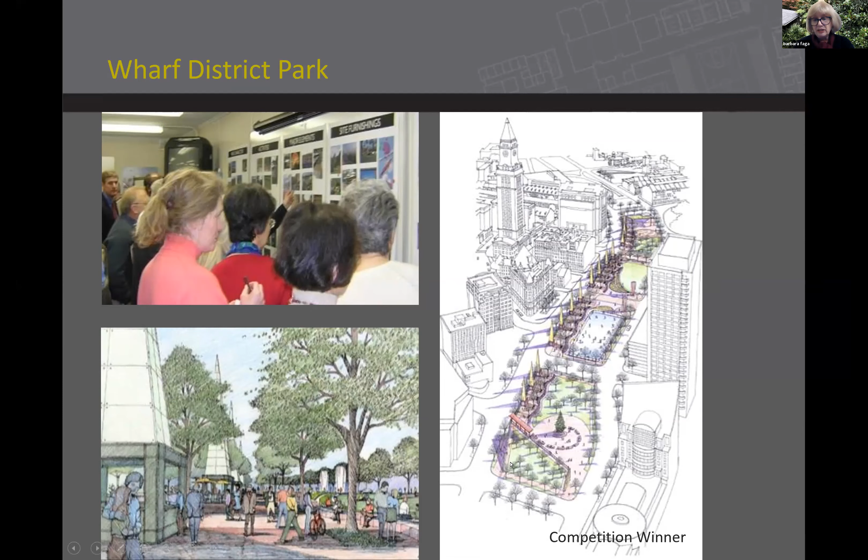So our team at EDAW was from our Alexandria, Virginia office and our Atlanta office, and this was what won. We were thrilled. We got the call right around Christmas time and we thought, wow, this is the best project ever. We were associated with a local firm there, which was important for us to have, since we did not have a Boston office, which was part of our problem.

So if you look at this, this is how we did it. These are old wharves, an old area where immigration happened for a long time. This was one of the central ports between Boston and Baltimore until Ellis Island was built. So all of these different wharfs happened.

We did a public design charrette workshop. We had a lot of different public meetings over the project. We were contracted to have 5 public meetings with the Turnpike Authority, but ended up having almost 200 meetings to get this approved. So you can imagine what this was like for planners.

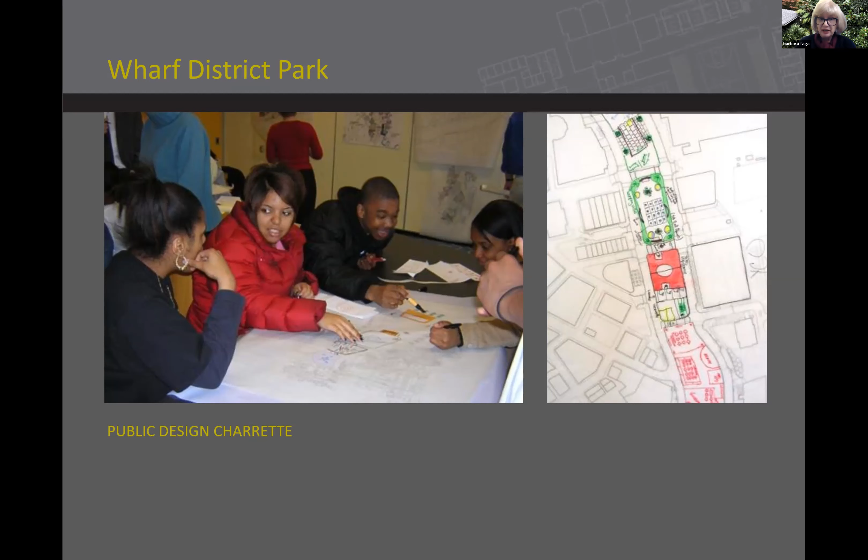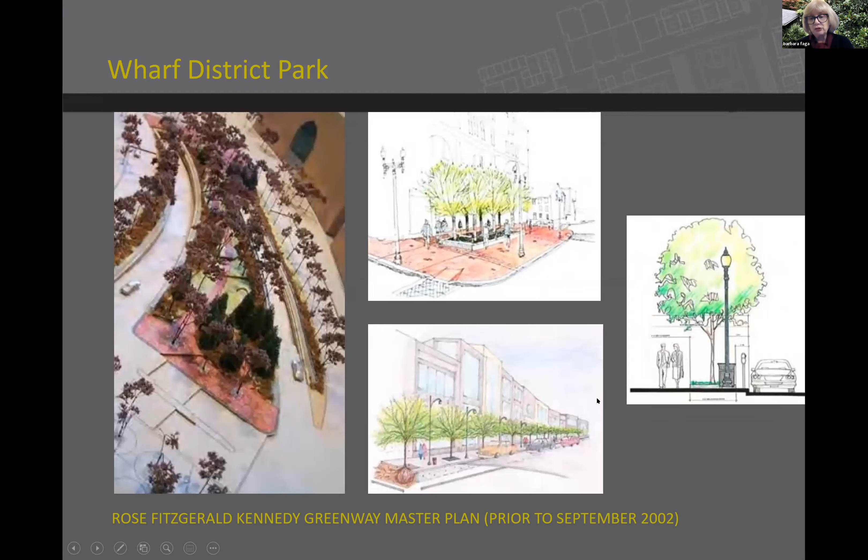Here's different pictures from different meetings that we were having. We did a lot of planning, a lot of sketching, and I want to take you through these pretty quickly because it's a lot of different design plans that were going on.

So we did one of our first public meetings that we held in the aquarium right across the street from this site. We showed them these different plans and we thought we were doing great, except that we got involved in a little bit of a political competition.

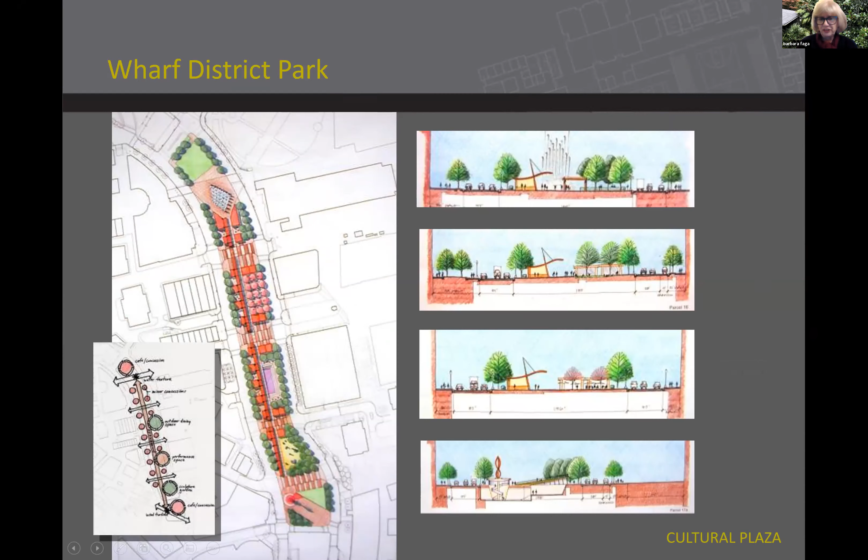Together with the political competition between the state and the city and the Turnpike Authority, and the fact that the neighbors, the community, did not understand how this park would work once it went in, they said we'd never have a park. They could not perceive, with these high rises, that they could walk across the street on a street that was ground level.

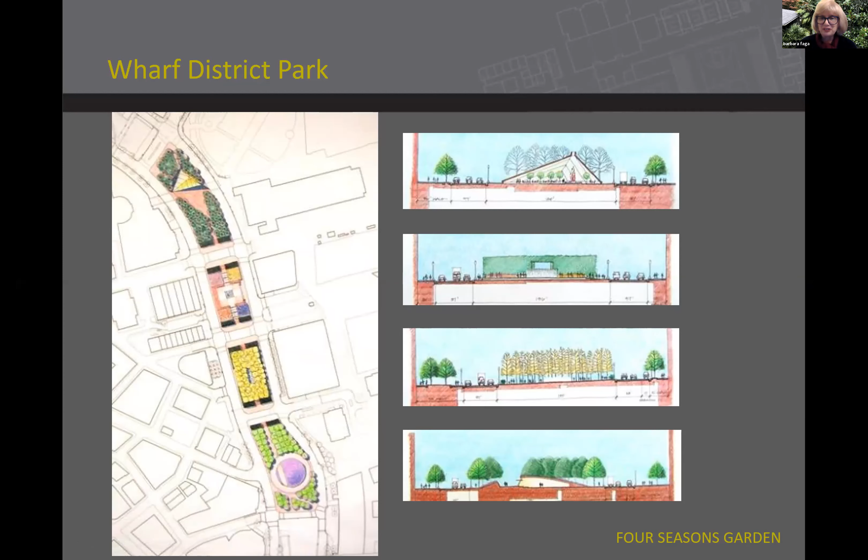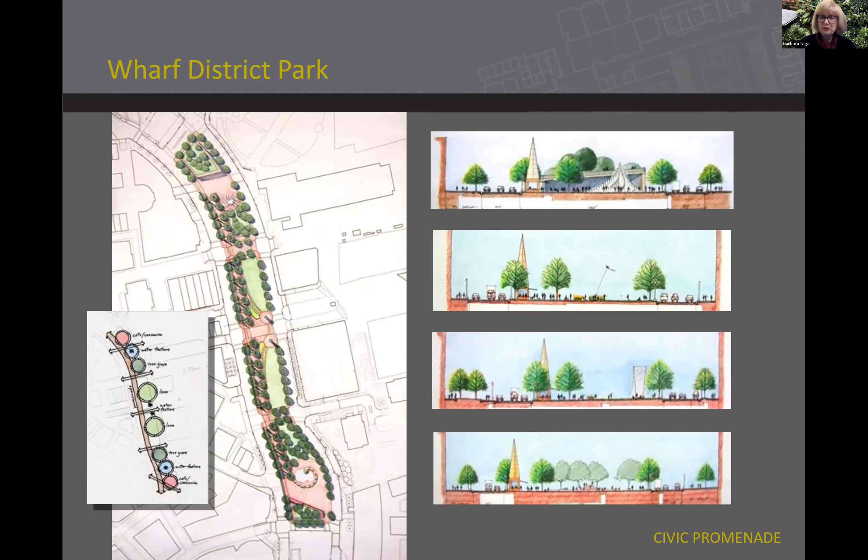So we had to keep showing them how to do this. Between the political battle and the community battle—and the community was lovely, they were lovely in the meetings—but they would just say, we don't understand, we don't see this, we can't envision this.

So we started to show them: here's the aquarium where we'd have the meetings, these are the wharfs, this is where that roadway was existing. They started to take it down as we were working on this. And we started to show them, you will walk this way. And they would say, no, we never walked that way, we've never walked that way, we can't walk across there. We walk this way and go under that viaduct.

And the visualization part was really difficult for us. Now, we were at the beginning of all of these computer programs, and Professor Allen and I talk about this a lot—what it was like to work in this sort of time when graphics were not that easy to do unless you were doing hand graphics. So we have all kinds of hand-drawn graphics in here, and then moved to some computer graphics as we proceeded along, and I'll show you how that works.

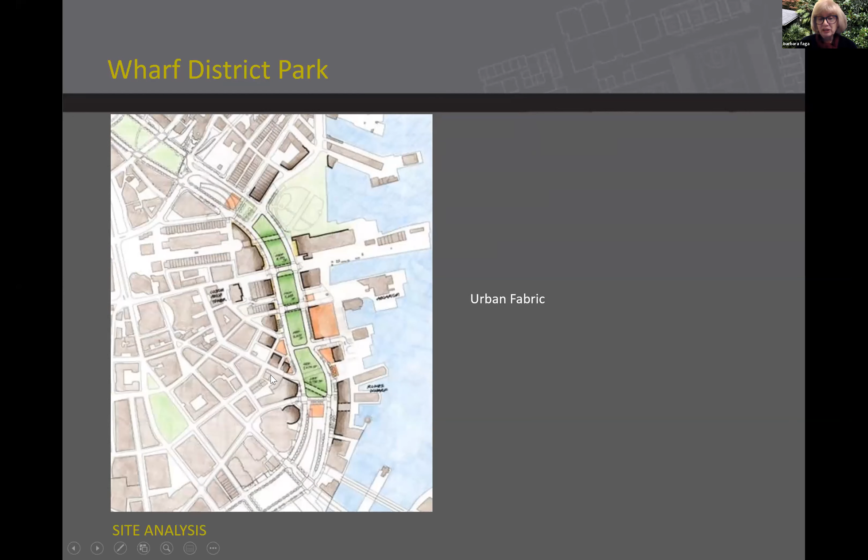So we're mainly working in this medium with drawings and sketches, showing people. But as Professor Nellison said a few minutes ago, people don't read plans. They don't see plans. Your generation reads plans, but people over 50 maybe do not read plans as well as you do. They don't see it. Many times I would sit through park planning seminars, and people would look at the plan I'd drawn where I had cars and trees, and they'd look at the tree and say, is that a car? They just didn't get it.

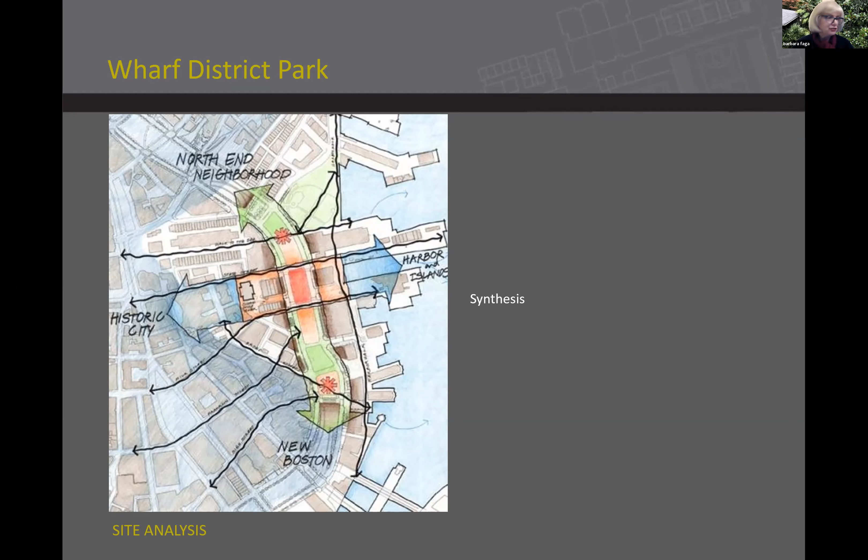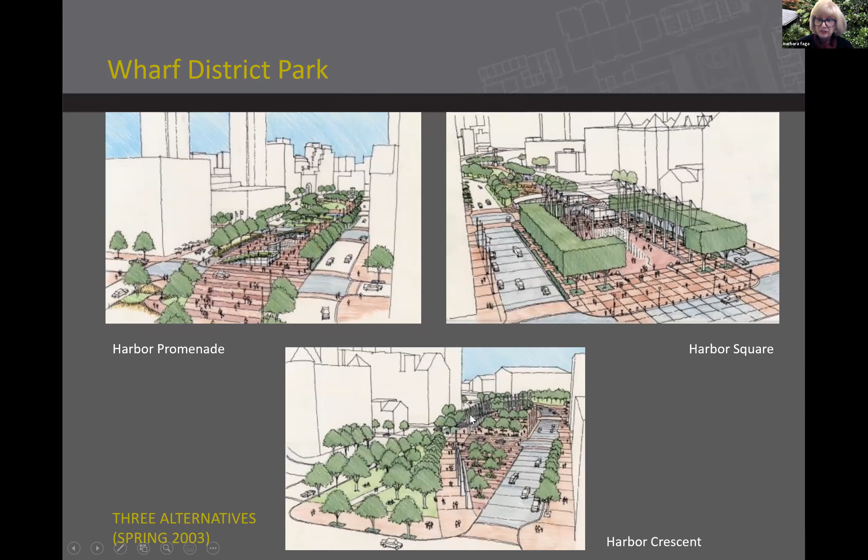So let me take you through these quickly. We're showing them different ways this park might emerge, and they would look at it and say, yeah, that's very nice, but we don't see it, we don't see how that's happening. And we would show them—I have thousands of these slides of how this would look.

We spent so much time working on this because we had offices across the country, and we would send it to Atlanta, or we'd send it to Denver, or we'd send it to San Francisco and say, here, can you work on this overnight? Because we have to do another public meeting in the morning.

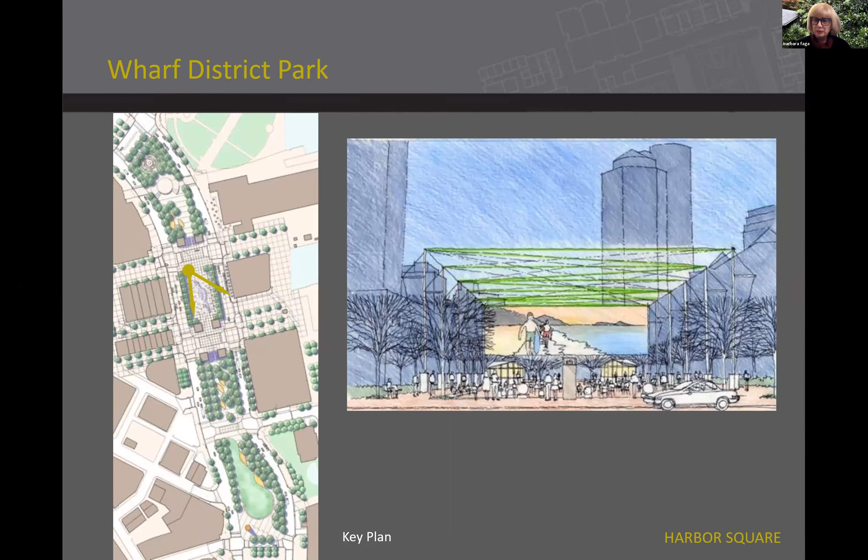So as I'm taking you through these, there was a big public park up here that was built, but we had a lot of different designs. And then we started to figure out that maybe it wasn't the design that was the problem, it was the imagery. So here's a few more. You're kind of getting the picture here of how much you end up doing when you're showing pictures.

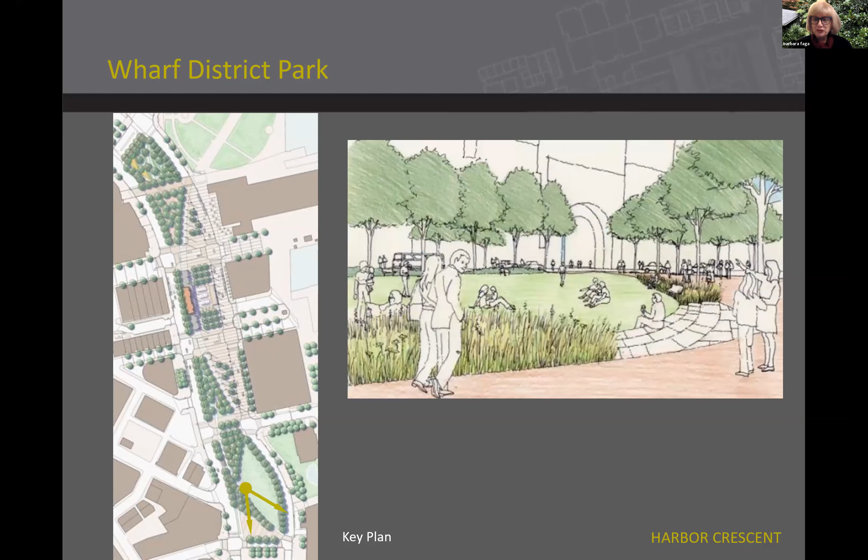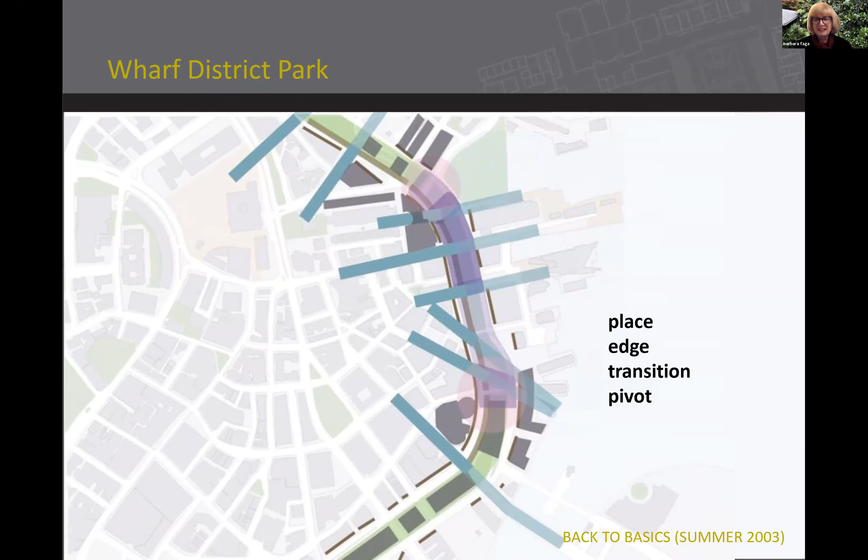We don't understand this. So as we work through this, you can kind of see, those of you who read this know where the park is. Here's the edge of harbor. We tried to show them how it would work with the park and with the buildings. Here's the aquarium over here.

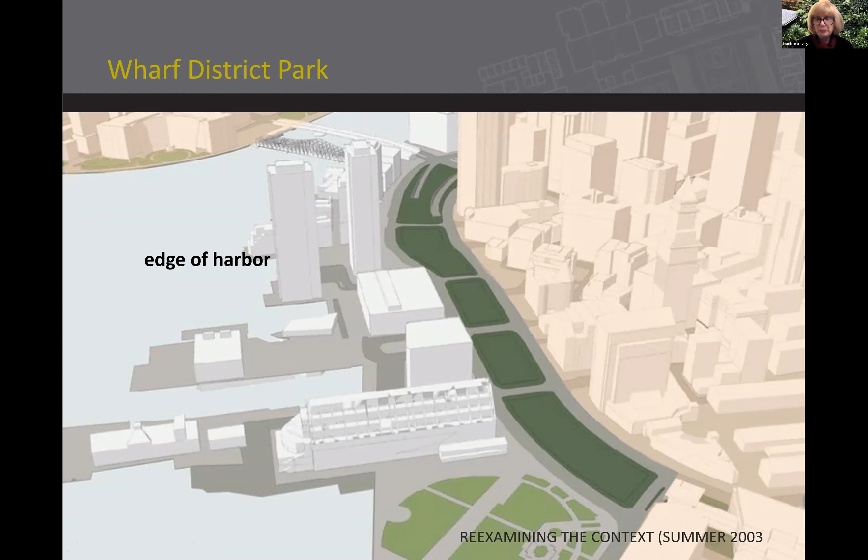And this is Faneuil Hall that Tony just spoke about in the last presentation. And so this is Faneuil Hall. This is the Custom House. This is a very historic part of the city with a park outside it. Should be really expensive real estate around there.

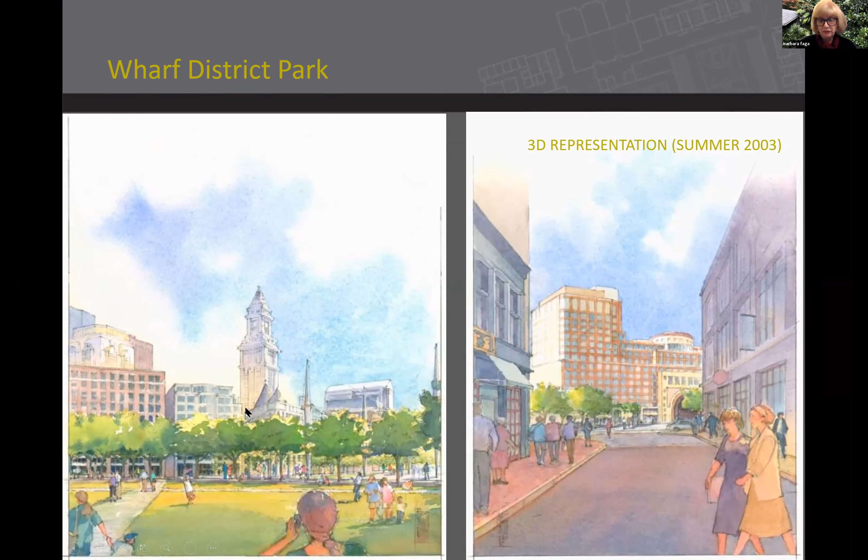When it's done, we went to watercolors. Well, the watercolors, which were very expensive at the time, these watercolors each were $5,000 to get somebody to do at that particular time. And they're beautiful, but they said those look like postcards. We don't understand that. Here's the Custom House and Faneuil Hall is underneath this. So this is what it was going to look like.

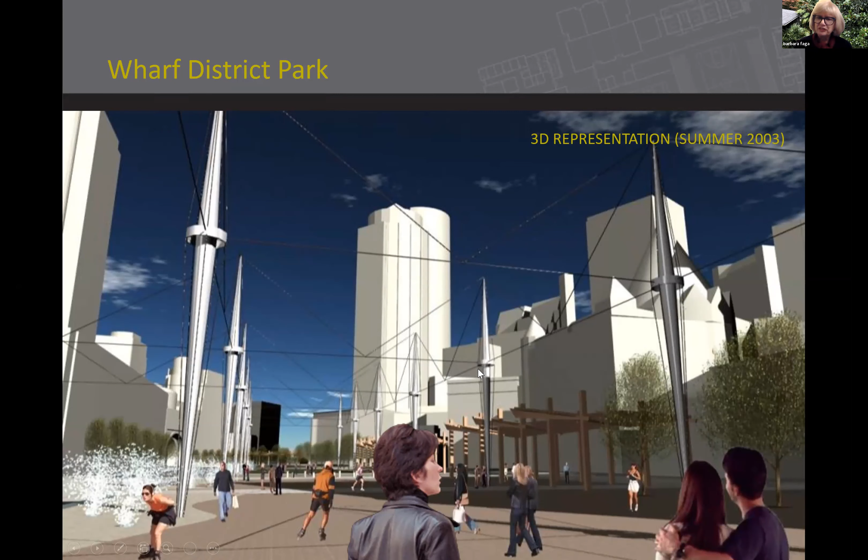We went into another, I don't remember exactly, this program might have been early Revit. And they didn't like this at all because these were big white buildings. They perceive this as you're building big white buildings. We don't like that. So we started to show them some other sketches, some sections. People didn't understand that exactly. They didn't understand how all of these traffic islands would work and how the roadways would work here.

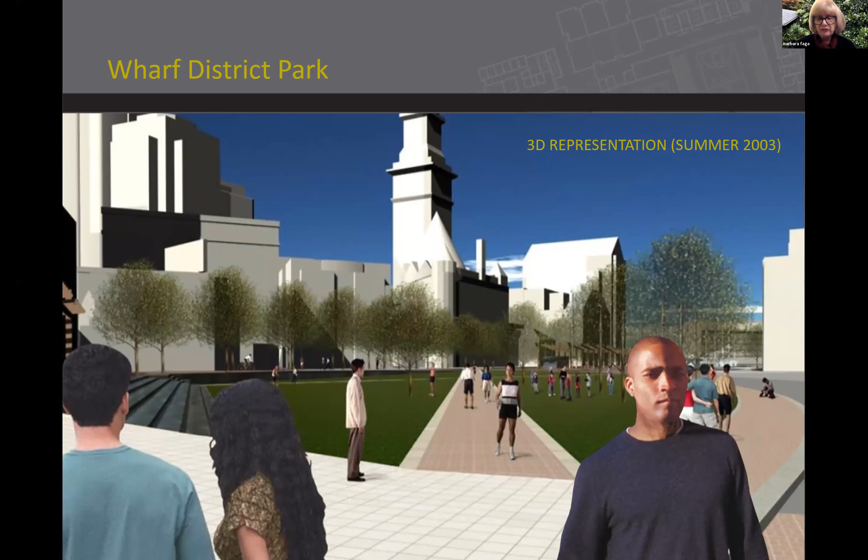So here, I'll take you through a few more of these. We got into Neoscape, which was a real early, like Revit or Lumion, someone who really knew how to do imagery, and they were good. We could not do these ourselves. With these, we had to hire this consulting firm that I think was right in New Haven, or it was a combination of MIT people and Harvard people who put these together.

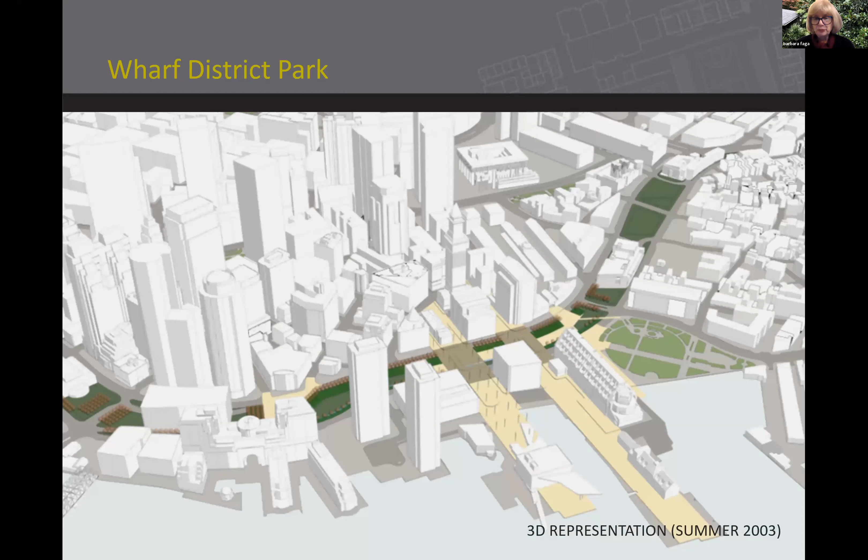So they're showing, we're starting to see real people in models, and this worked. That started to work. Then we got to more realistic looking. So we're doing this at the same time that the software is being put together and developed. I'm sure we had software developers looking at how these things were going and what they needed to develop. Here's the building that I showed you that was cut off when it originally went through, and the Custom House is over in this location. And more drawings.

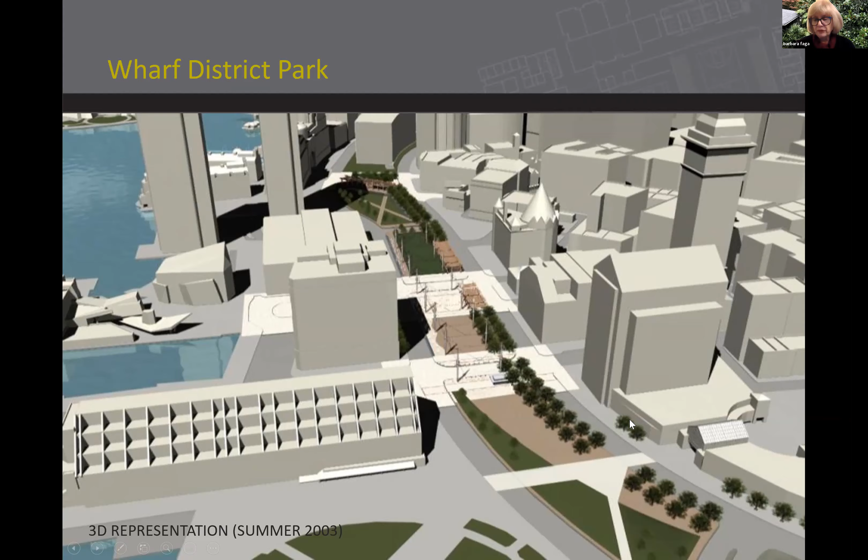And more drawings. So when we got to these little drawings with the little sketches and the cute little people, people started to get it. I'm not particularly sure if we wore them down or if they just started to figure out what it was that we were doing. But the public meetings were every other Wednesday night, at 6 o'clock in the aquarium building, and in the parking garage had a big building, and people enjoyed coming to that. They would come to that like it was an event, meet up with their friends, go out for dinner afterwards. It was a social event, which community meetings are supposed to be, with coffee and cookies and everything else. But when we got to these nice little sketches that were very quick to do, people liked that a lot. They seemed to relate to that, and they could begin to see what it was looking like.

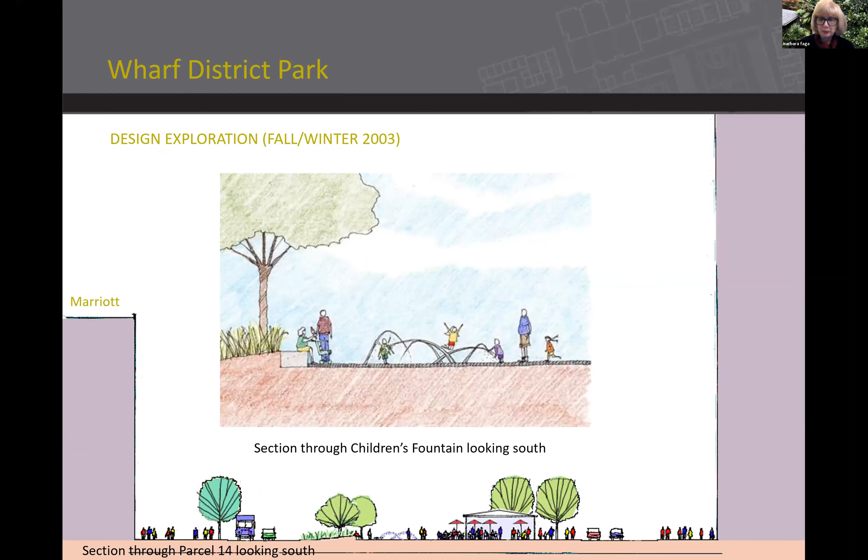So we moved into doing more of these. We had all of these little sketches.

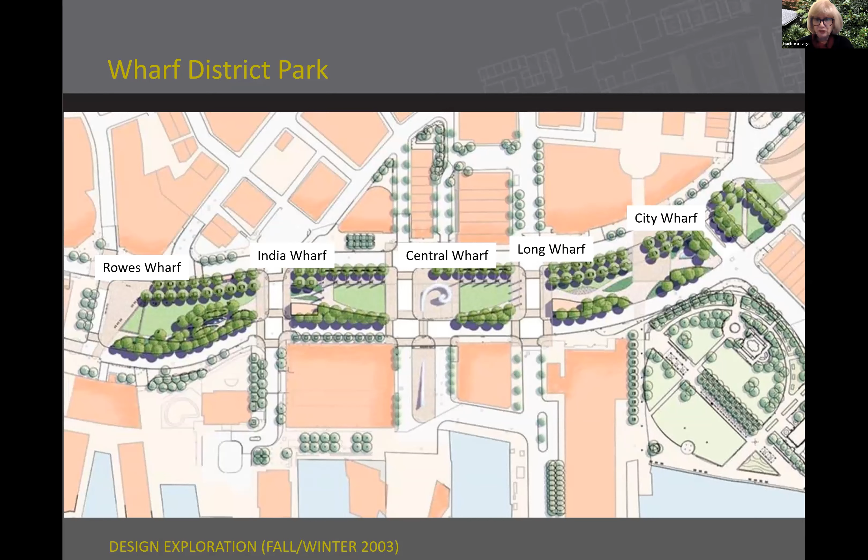I'll show you where we went next with this. We started getting more into design. Once we showed them comparables, pictures of flowers, people loved it. They immediately got into it, saying, whoa, there's going to be flowers there, it's going to be beautiful. That was what really sold the project in the end—that it was going to be beautiful.

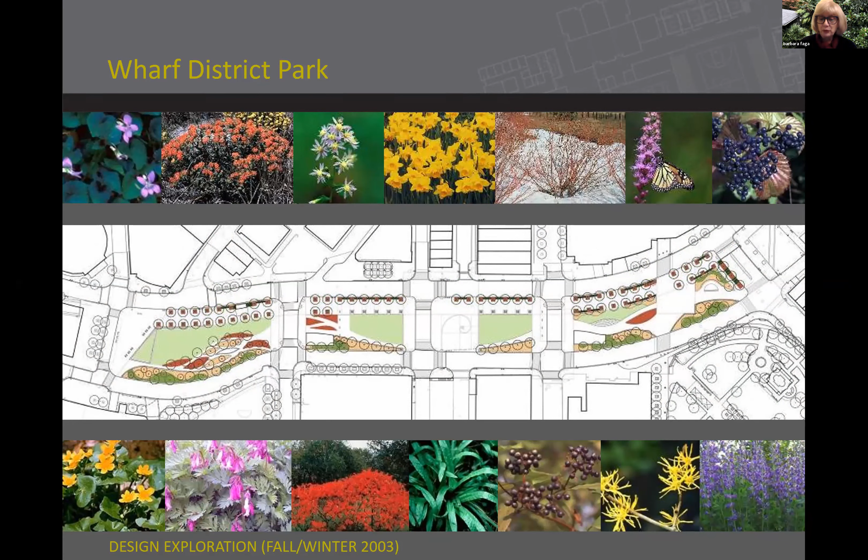There was going to be beautiful plant material. They could talk about the plant material they liked and tell you what was going to happen there, and they really enjoyed all of that. So the more plant material we had, the better the presentation went. This really worked best.

We would show them a sketch and what it looked like with a comparable. I do this in my studios that I teach at Bloustein: you always have to show people where it's been built before. Politicians don't like to do things that have never been done before. They want to see what's been done, who's been successful, and then they will adopt that. So we showed them lovely lavender areas and what it looks like in reality.

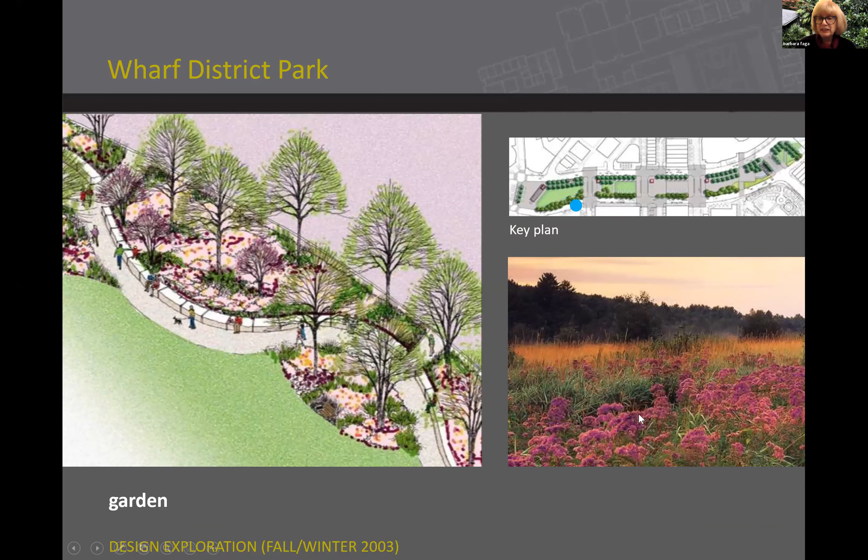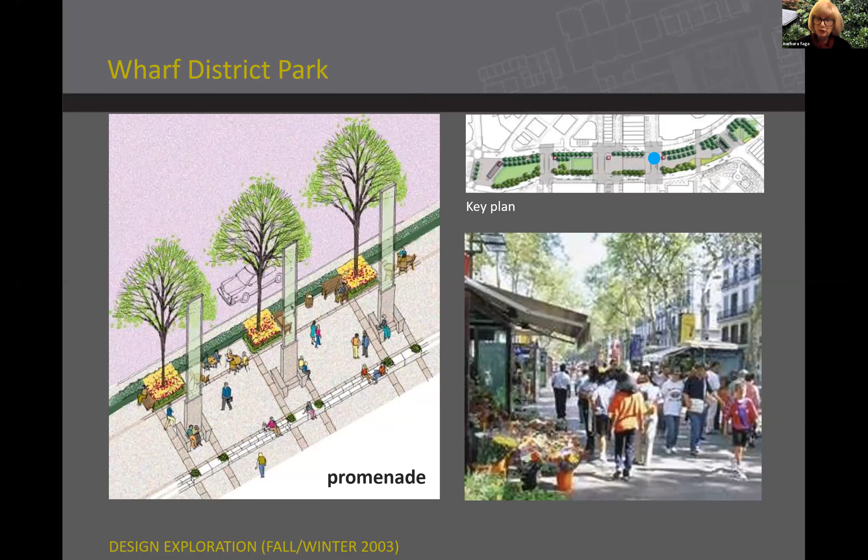They liked it. We showed them a walkway, the Ramblas in Barcelona—something they could relate to, because it could happen right outside their door. We showed them a fountain and what the fountain would look like. This worked great for us.

And it went on with flowers and trees and people outside. This is the comparable—this works great.

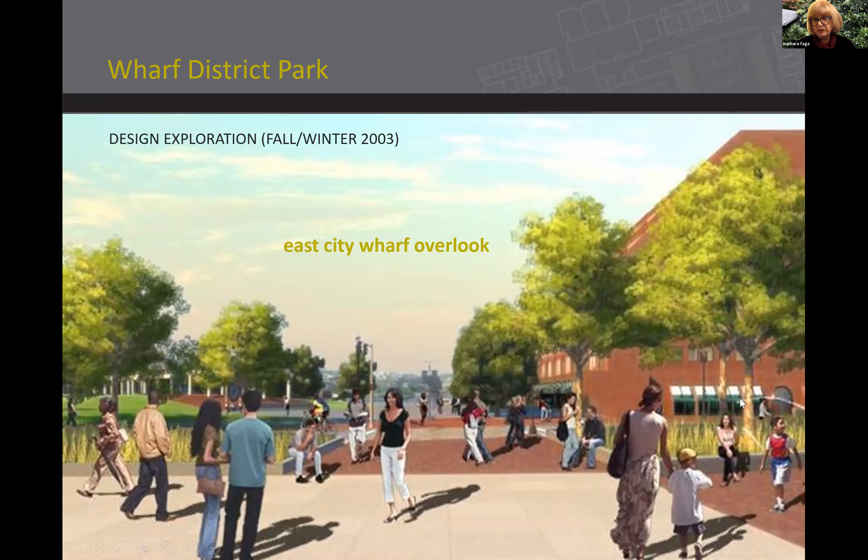Meanwhile, Neoscape, the 3D consultant, was getting much better with their software, so they could actually put the skin on the buildings and show what it looked like with people. These were very expensive to do and took a while to put together—not like you can just order them up and do them in a day like now. This took days, and was costly, but effective.

People could begin to see this. Our client had bought a lot of these sketches, so this worked out really nicely. It was good, but you had to sort of build up to get to this.

I'm not sure—had we gone right from the meetings into the comparable sketches, that might have worked a lot faster. I learned a lot on this project. I'd done many public meetings before, but it was interesting to learn how people actually see designs.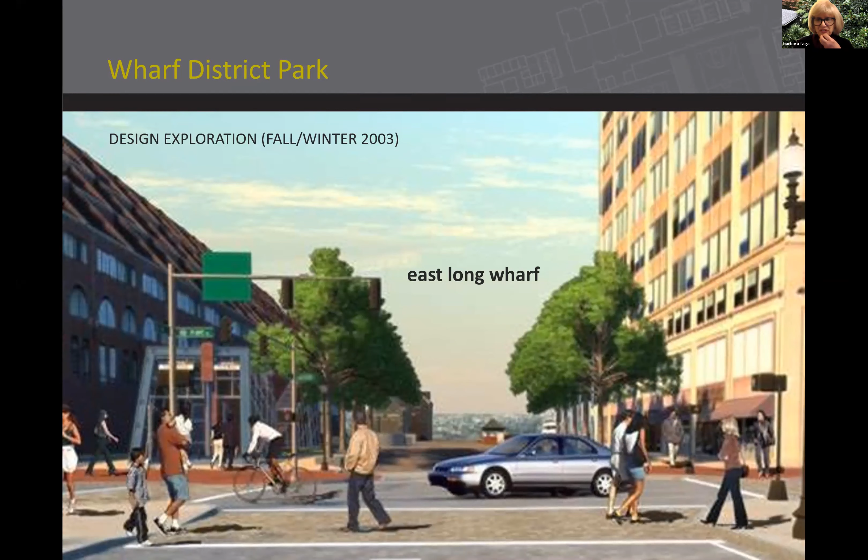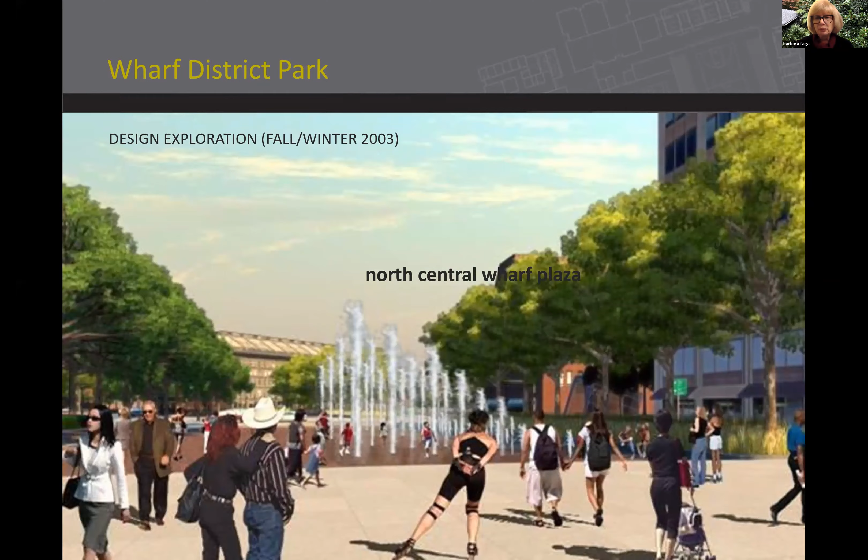I would stand outside after the meetings and ask, how was this? People would say, well, this was good, I liked this presentation, or I didn't like this presentation. It was like if you had those clickers you use now—you could ask what people really think and get feedback a lot easier.

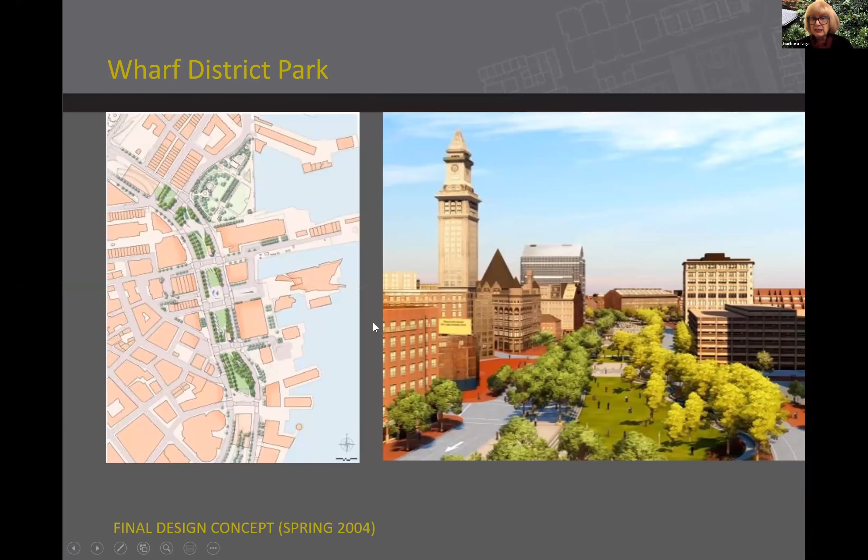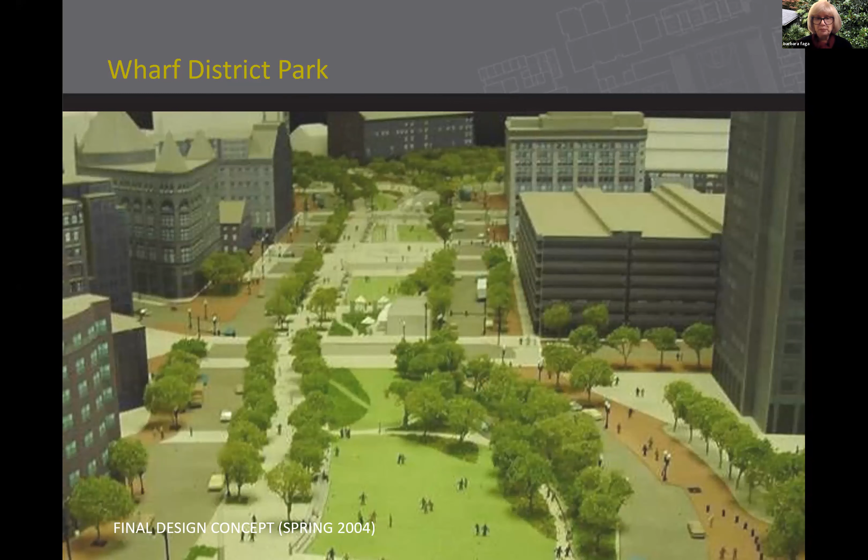The end result was we got a model. This model was about $45,000. It was beautiful, big enough, I thought, to walk through. We watched them make it. It didn't light up or anything, which surprised me given how expensive it was.

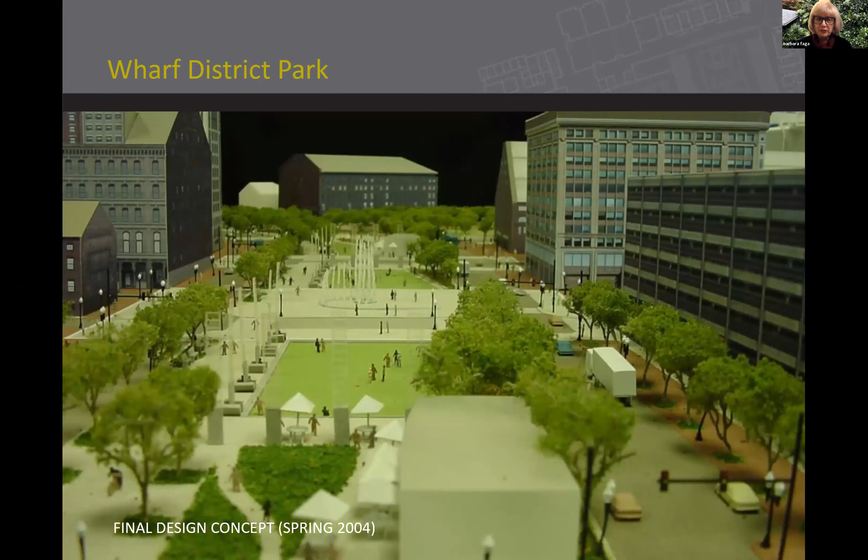But once people saw the model, they loved it. These photos were taken in the model shop while they were working on it. You can see the custom house again, and here we are looking at the model.

When we brought the model out, you could see people engage with it. Now they're starting to see how this will look, because outside their window it's just a big construction zone. But now they're starting to see the I.M. Pei towers and the custom house, Faneuil Hall right there, and all the other buildings—you can start to see the design.

You can kind of see me in the background looking doubtful about whether this is working, but it worked really well—they loved it. Some of the architects involved in the project suddenly started engaging with it, now that they could see what it was going to look like.

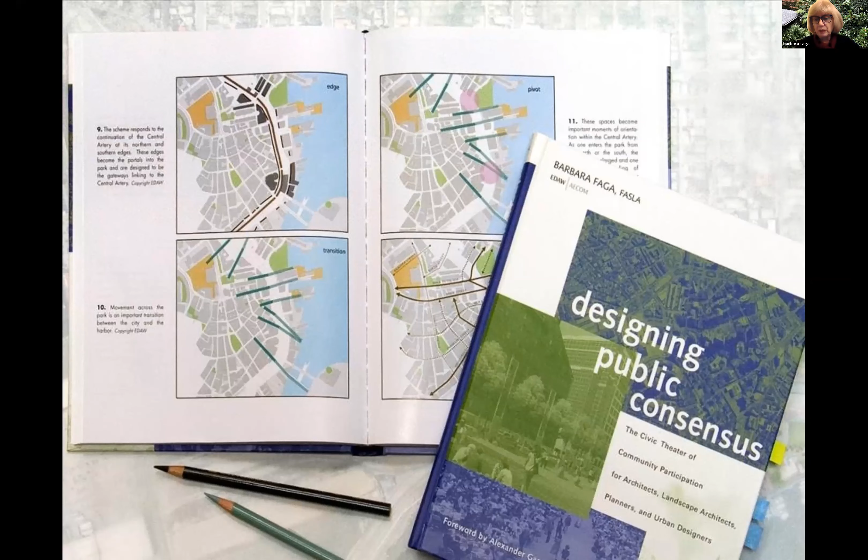I ended up with a lot of notes and put together a book out of this about designing public consensus. This project is still going—once we got into details, people liked it even more.

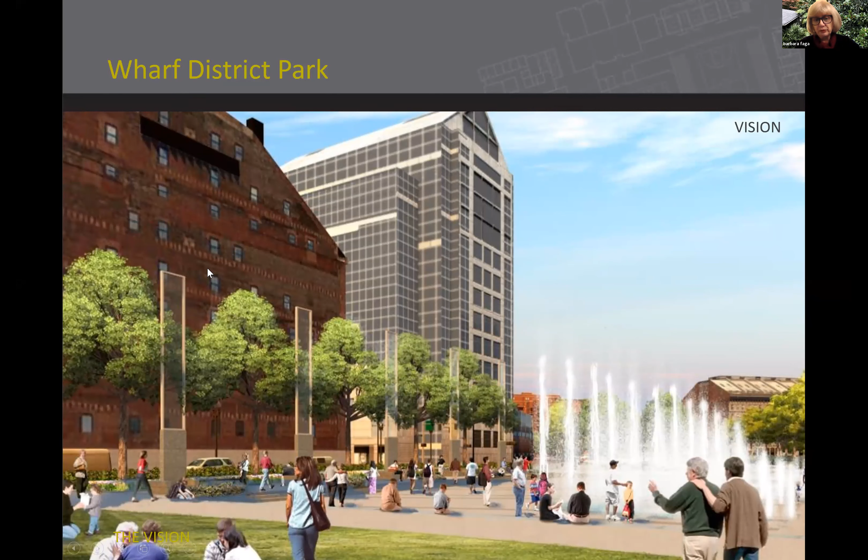Here's some more of the Neoscape drawings. This ended up being the one to two million dollar condos built in this building, with lovely balconies added. It's a high-end area to live in now because of this gorgeous view. And here's some more—you can see Neoscape's work down here.

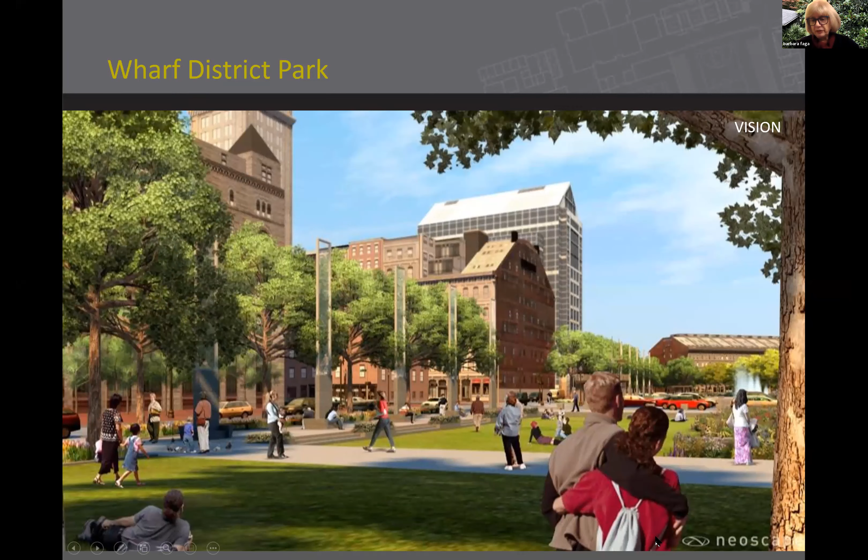And this is one of the images we ended with. The water fountain is lovely there, the play fountain, people loved it. The community originally said no, we don't like fountains in Boston, but they seem to like this fountain. They also told us not to leave lawn out there. Nobody uses lawn in Boston, but they use the lawn.

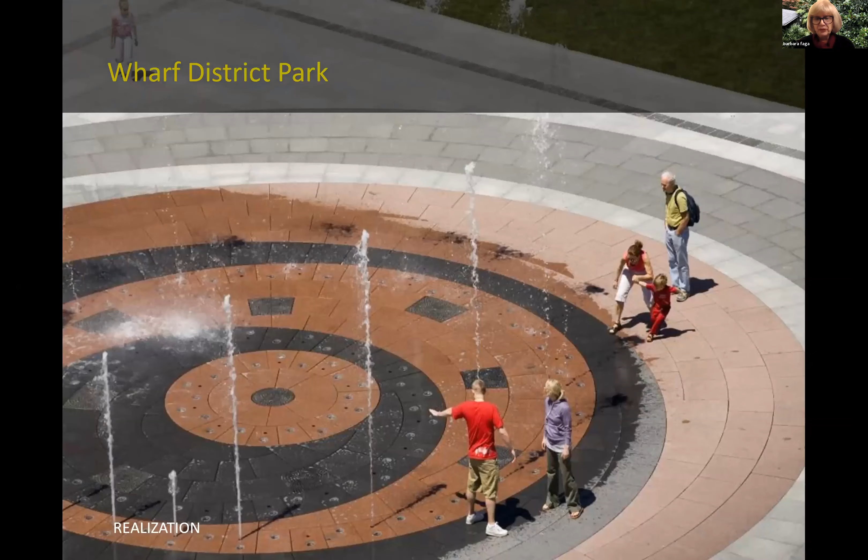And it's very, very well received. People love it a lot. People lay on the lawn, people use the lawn. I love this picture. We put the lawn in saying, if the lawn didn't work, you can pave it over later, but just try the lawn. People love the lawn and people love the park. And that is perfect timing.

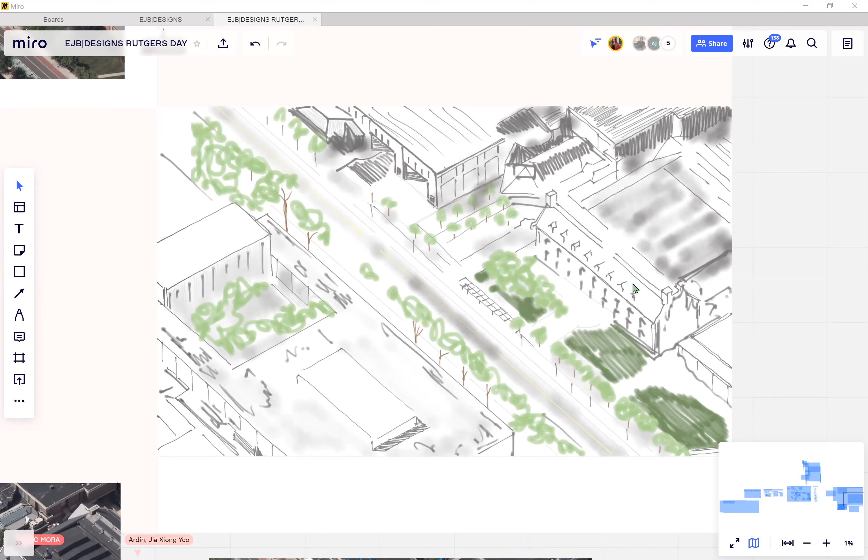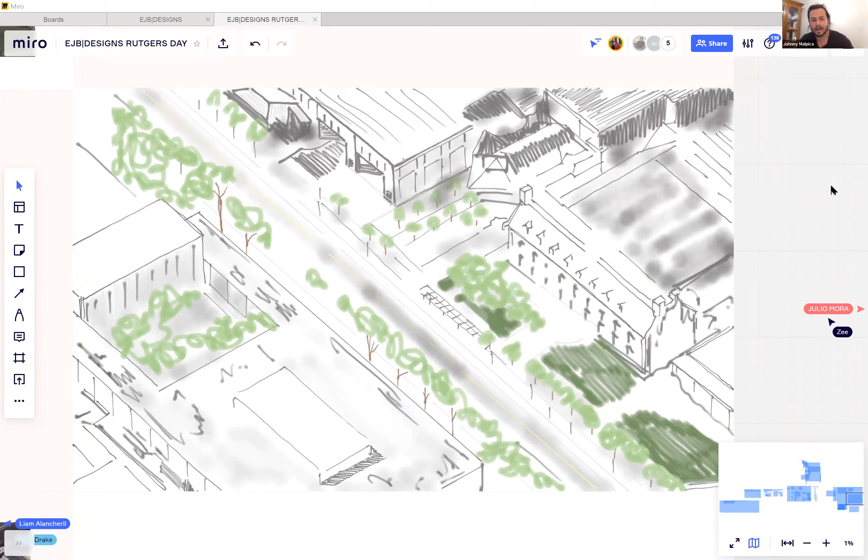My approach was to first just outline the buildings and then take note of the amount of roof space on buildings that, for the most part, in my opinion, are kind of low. I don't know what it is with Rutgers, but they love building things half underground. So just for me, the amount of roof space on Brower next to Clothier could be better utilized as an outdoor dining section. That would have been interesting and cool. So I did that first—outlined the buildings and took note of the roof space.

And then I looked at the streets. I also added a little shadowing and then just took note of the amount of landscape elements—the trees and grass fields. I think there's an adequate amount, and I think it really adorns the street well. And then I added a tiny drop of details. So that was my approach.

If in reality, I think this space of College Avenue is nice, has the bones of a nice space, but the architecture, with the exception of the gym, in my opinion, humbly, is borderline appalling. So I think there's a lot of simple things we can do as planners, quick and dirty fixes to make this a way better space. A lot of those have happened over the years that I've been here, but this was a fun exercise for me. That was my approach.

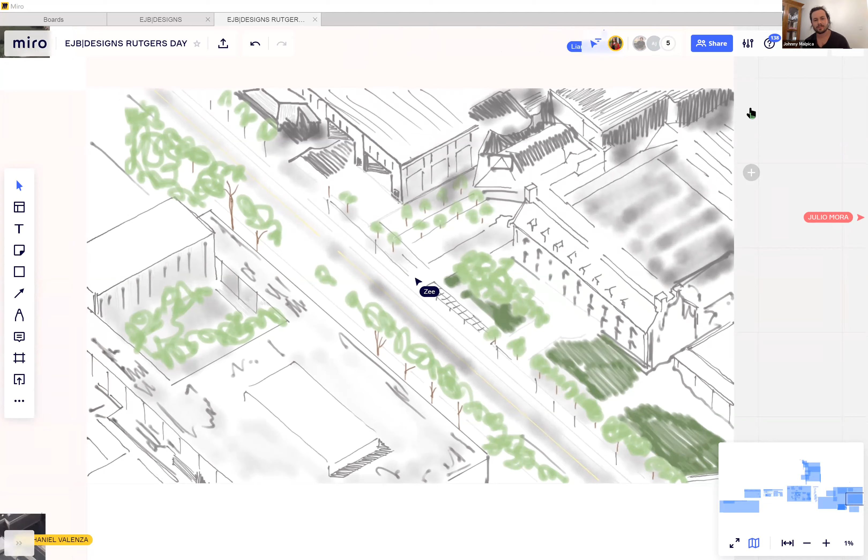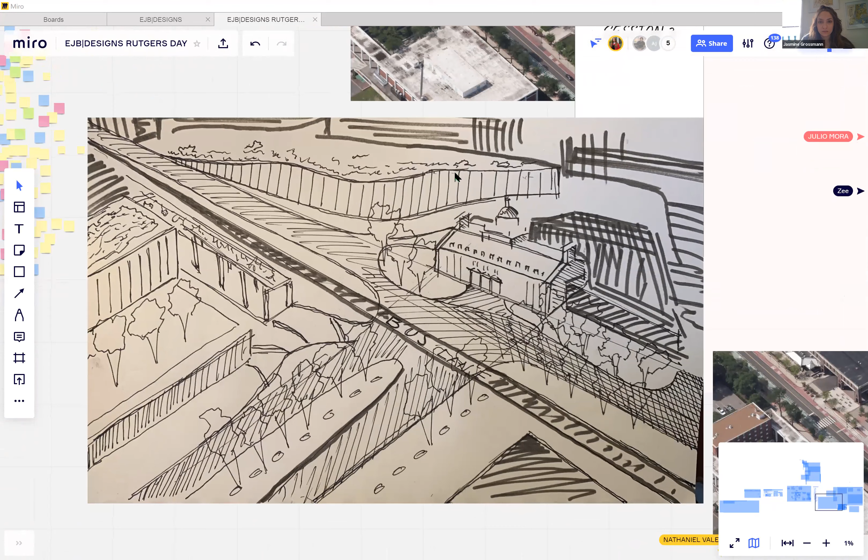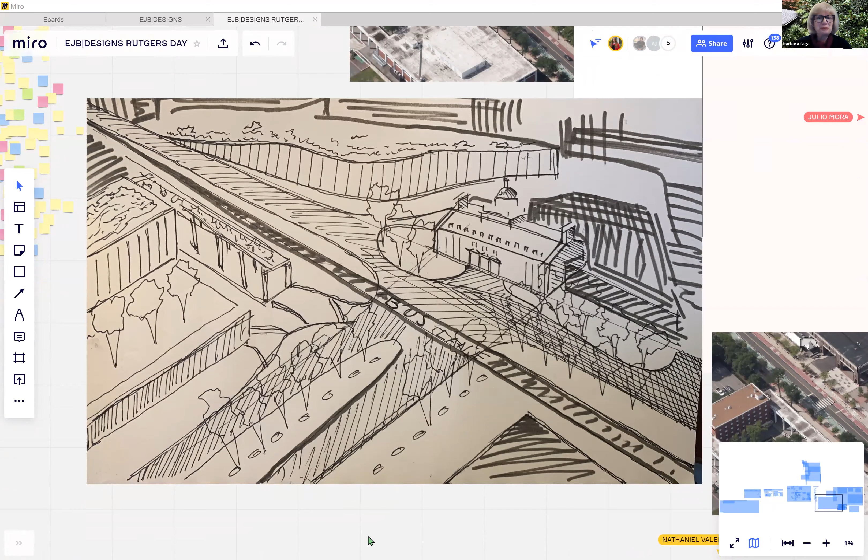Great sketch. Love the landscape in it, and it would be a great opportunity for green roofs.

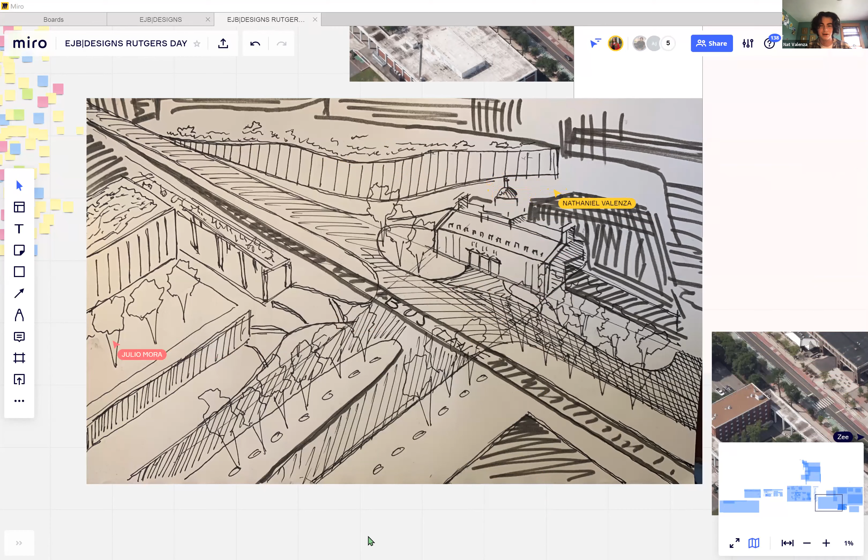I completely did away with the campus center, and I thought it would be really cool if there was a building that integrated more with the landscape, especially if you got rid of that horrible parking lot in the back and made the whole thing one large utilized space. I thought it would be kind of cool to do a building that works together with the field, because that's the original football field where the first college football game was played. But you wouldn't know that because it's a parking lot. So if you brought the field back and made it a public space again, you could do kind of a nod to that. I guess the biggest thing I kept is the gym, because obviously everybody likes the gym.

Sorry, Nat. I tried to copy in the master plan you just mentioned, but I accidentally moved your sketch. I'll add the link again here. If anyone hasn't seen it, I haven't seen it yet either, and now I'm looking at it and it's pretty amazing.

I didn't realize how much actual thought they put into this. I also put in a dedicated bus lane and got rid of the street, turning it into kind of a pedestrian network. The bus lane could then at some point be turned into a light rail network, which I think is where they should ultimately go with the bus system, because the bus system is just not great. Nobody really likes the bus system, and it at least needs to become more efficient.

Yeah, I love it. What do you think, Dr. Faga? Looks great. Could do that.

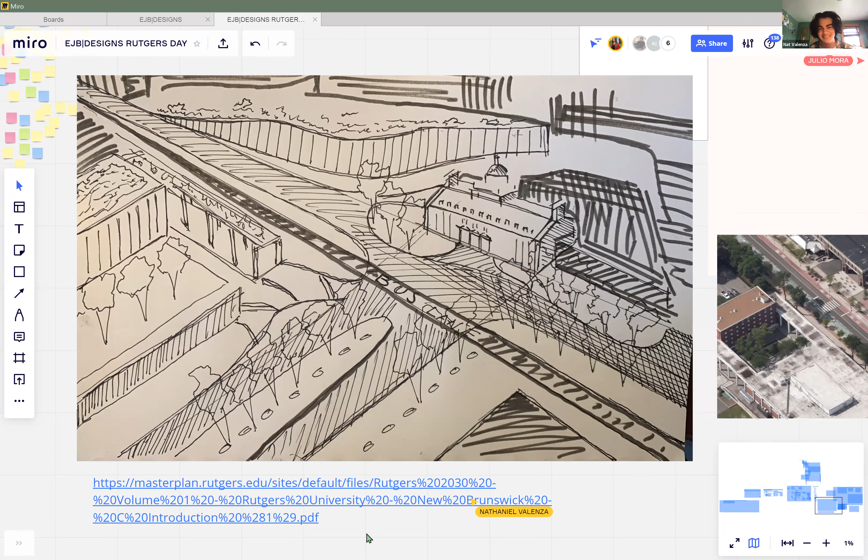And the connection to the rivers, who put this in here, Johnny? About our alma mater on the banks of the old Raritan and how we're actually connected from the banks. Yeah, that's me. I didn't know about the football stadium either, that that's the original location, because they don't make a big deal out of that. And we talk about the river all the time, but we sort of turn our back on the river, definitely turn our back on the river.

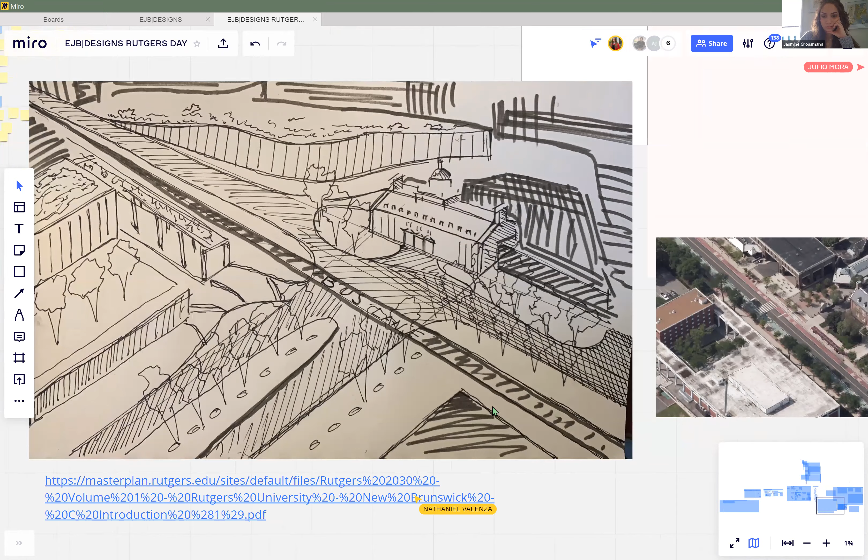Whose is this? You want to talk about your thought process here, or what you were thinking? Yeah, that was fine.

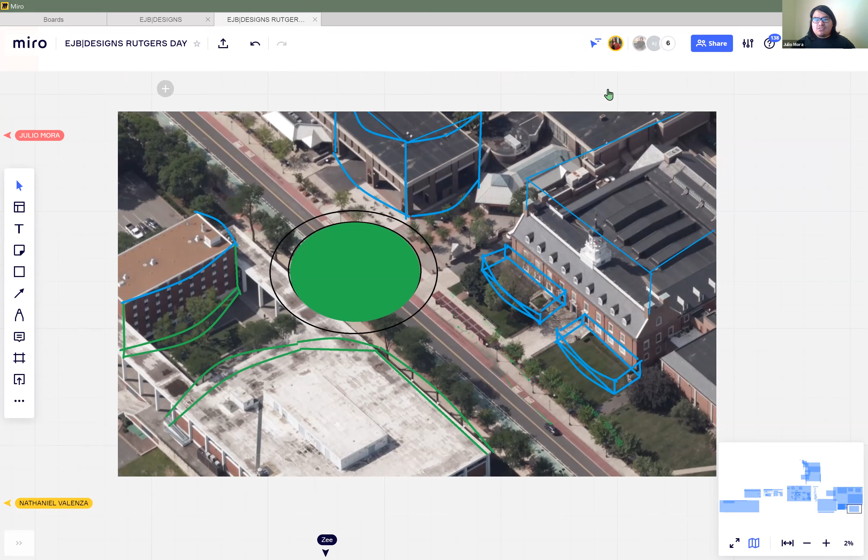All I tried to do here was better connect the public space on both sides with a traffic circle that would also be green public space. I further tried to work with the existing buildings by adding additions to each one that would reorient frontage, so that they're all actually facing the public spaces, because I think right now most of these apartments have their back to it. And then that building where that driveway is has its entrance buried within that. So I just kind of tried to bring it all closer together.

Nice, looks good, I like it. Traffic circle. While I don't usually like traffic circles, that looks like a good location for one.

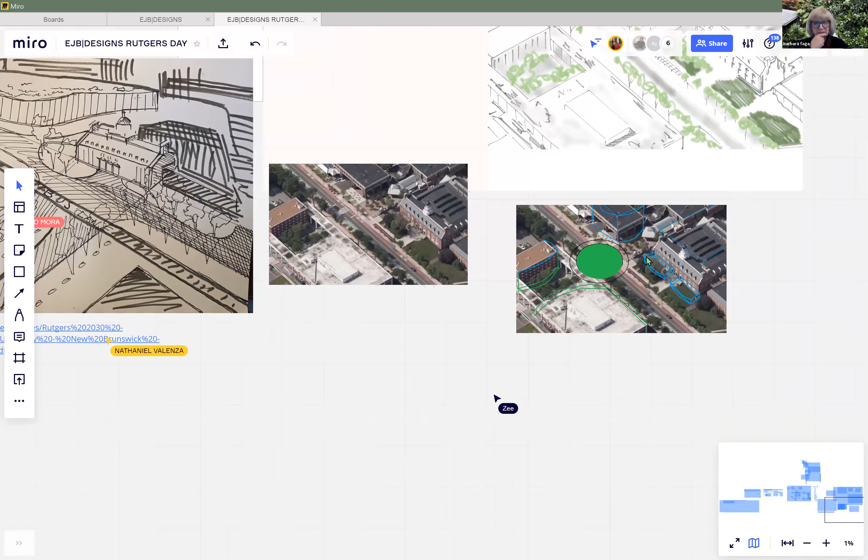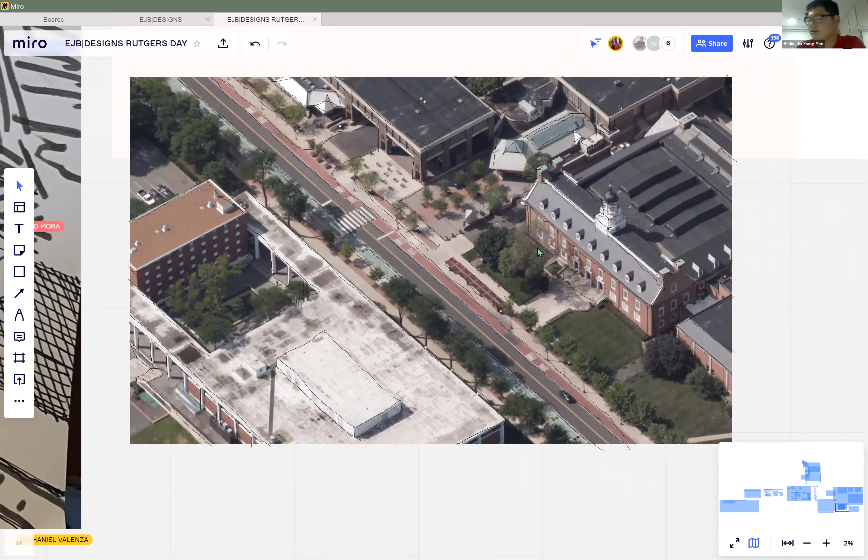Let me see, I think we can see yours, Ardin. Is this yours that you sketched over? Yes, unfortunately I'm really bad at trying to draw on the computer itself, so I didn't really accomplish much. No, it's okay, we're all learning. This is a new program, and trying to sketch digitally isn't always easy. But you did, it looks nice, it doesn't look bad. Put in a roundabout.

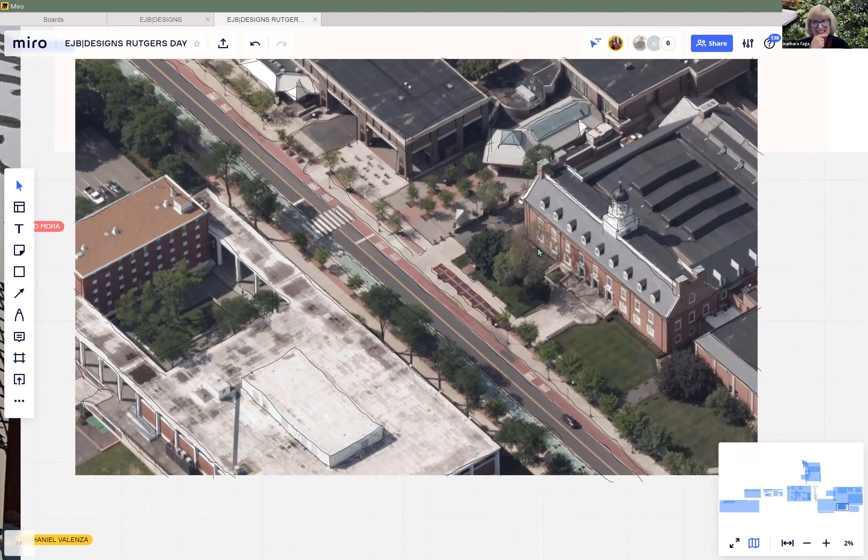What's that? That's a famous Paul Drake quote. Ah, that's interesting, I bring that up anytime I can. I love it, what did you say it again? I didn't hear it. He's famously said, 'When in doubt, put a roundabout.' The one I know is, if you can't do it right, paint it white.

Did anyone else put a sketch in here? Paul, did you do one in here, or whose is this? Who did this one? That's not me, no, I'm still figuring out the program. Embarrassing, I did this one. Oh nice, so what were you thinking as you did it? Liam, right? Was that Liam? Yes. Okay cool.

So at first I was just trying to draw as much of it as I could. But then I looked at just the amount of blank space on the roofs, and I thought, okay, there's probably definitely opportunities for green roofs here.

And then I also decided to just remove cars completely from that street, because I looked at a map and realized that College Ave isn't one of those streets that goes completely through New Brunswick. It gets blocked by the railway, so it's not necessarily a vital arterial for cars to be driving on. So I thought, why not, if the bus lane is already too small, why not just make the entire thing for buses, and then expand the bike lanes to both sides.

So I just picked the colors there to represent the red as the busway and the green as the bike lane. But I think ideally I would want it to be a similar color to the pavement so that it's more obvious that people can walk across, not necessarily having to cross at a specific crosswalk. But I wasn't really able to illustrate that.

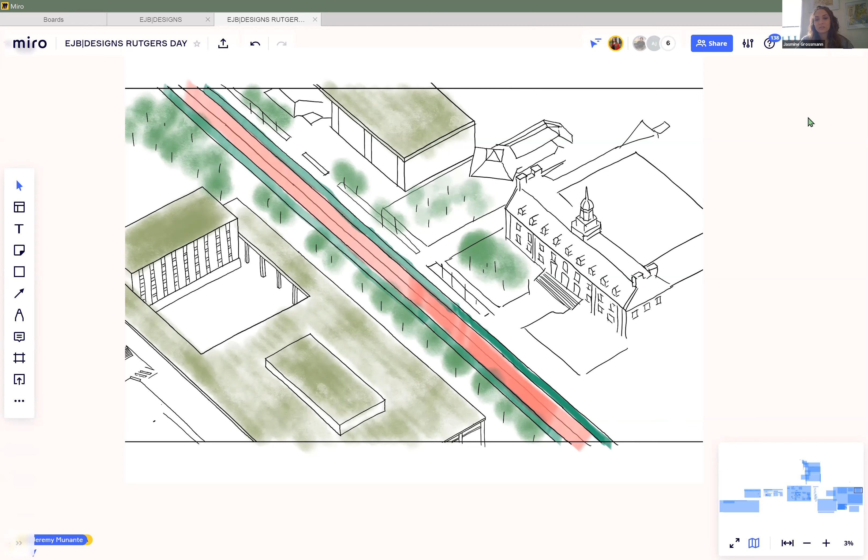Basically what they did is they took the existing parallel parking lanes and made the bus lane the same width as that 7-foot parallel parking lane, and same thing for the bike lane. So the buses don't even fit unless they want to drive with the wheel against the curb. And people don't bike as much because it doesn't really connect to the broader street network within New Brunswick, or doesn't connect to other campuses. And if you do want to try to get to another campus, the route is hidden and you have to ask around to figure out how to get there by biking.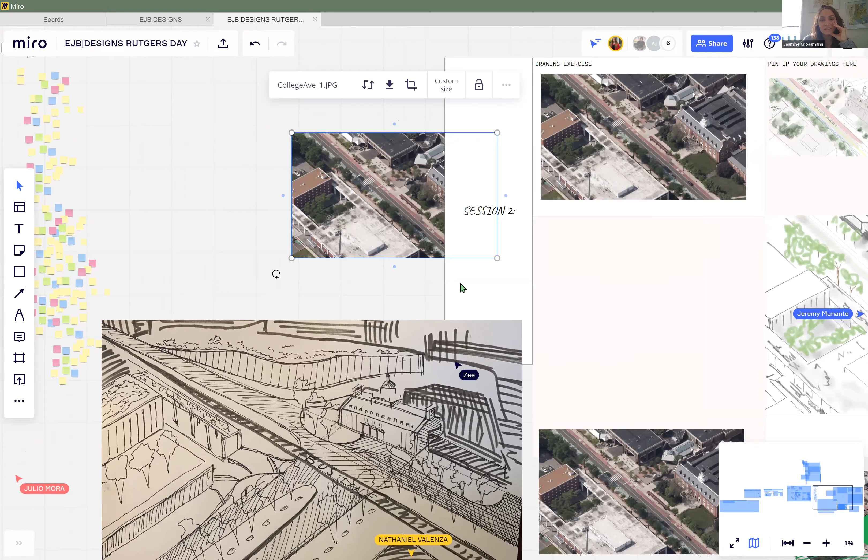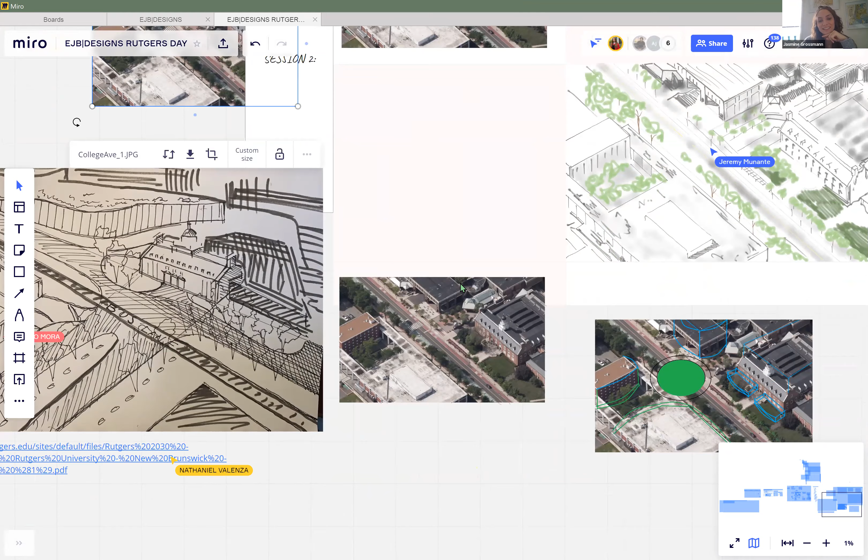People are crossing at all different locations. It's crazy. Right. Yeah, whose idea were those? Who planned that street? Not Bloustein, I don't know. Not us, they didn't ask us anything. It probably should have.

Did anyone else get some sketches in? I basically just traced it, I didn't do any design work, which now I'm wishing I did. I might have to come back and do that now. Or I just drew what was there.

I like that, I hope Nat's plan actually happens. Sorry, Dr. Faga, these are really interesting, it's nice to see different ideas. You miss doing that. Yeah, this has been a lot more fun than I thought it would be.

Thanks, Johnny, thanks so much. Not that, I'm just saying it's hard to stay indoors on a Saturday when it's so pretty out, but I'm having a good time, so you've made me enjoy the interior of my house more. Be proud. Oh, thank you, I guess then.

Did anyone else put a sketch in here that we didn't get to look over yet? I see Jeremy in here and I see Zee. I don't know if you guys are able to upload your image or if you can't find it.

Hey everyone, sorry, I missed half of the session, or 3/4 of it. I just joined in 10 minutes ago. No problem, what are you doing? Yeah, we're glad to see you or hear you. Hi, can you see Zee? How are you, Zee? Hi, good, how are you doing?

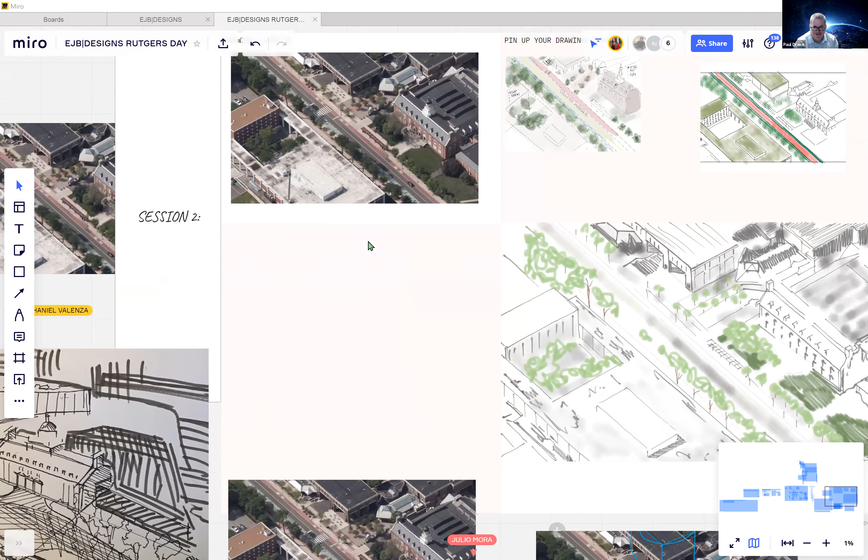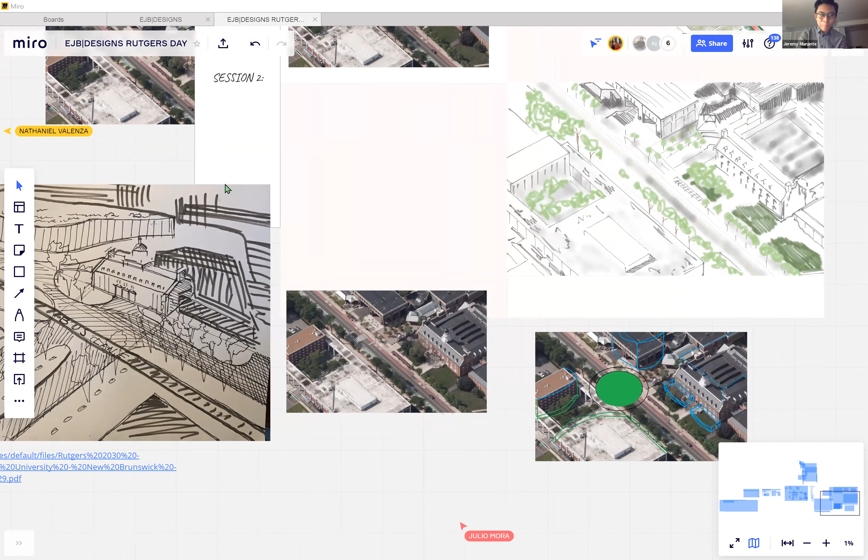Well, I hope if anyone didn't get to do a sketch, you can always add it later because you're going to be in this board forever now. Jeremy, can you hear me? Not sure if you can hear me. Yeah, Jeremy, how are you? Hey there, yeah, this is my first time using Miro, so I literally don't know where the drawing went.

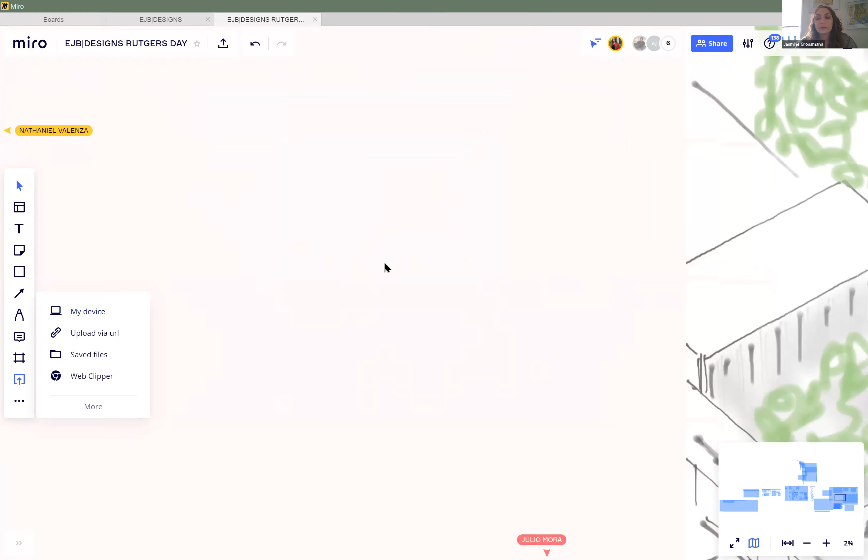If you try and zoom in, like this, as close as you can, and then hit the upload from your device, it should come up in front of you tiny, because right now this is zoomed out to like 1%, but it will zoom in. Let me try, it will upload tiny. Yeah, try one more time so we can look at what you were able to do. Okay, I think you can also drag and drop.

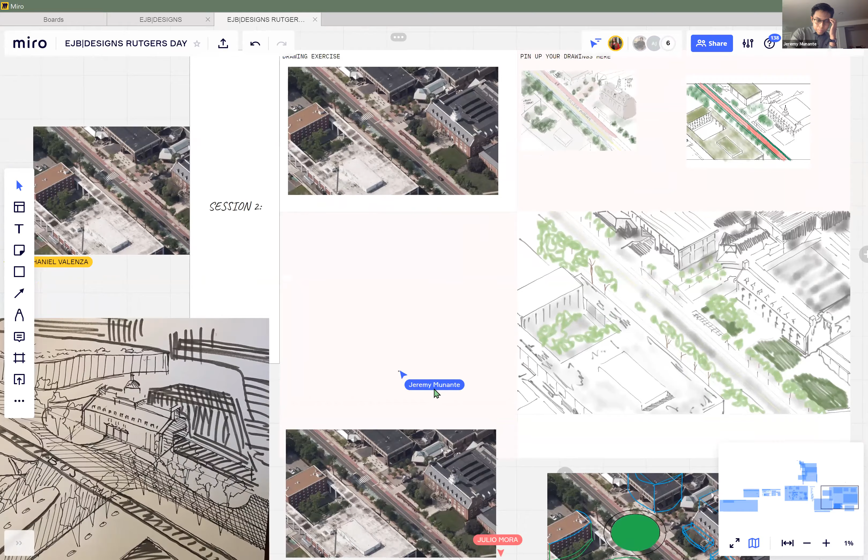This is my second time using Miro, so I'm not an expert. Oh, there it is. I can't find my way. There you are. There, wow.

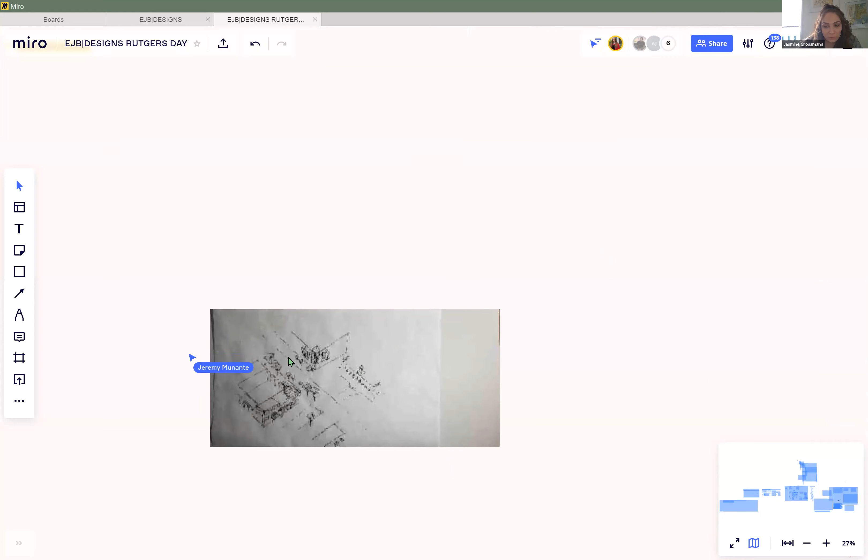Yeah, can you see it? Yeah, I can zoom in on it. This thing zooms in forever. Oh nice, use tracing paper? Yeah.

I was just quick because I didn't know what to do with it. I didn't even know the link was there until after we stopped. Sorry, but my idea with that - I'm forgetting who's the guy who said this, I never met him.

He's the guy who said he wants to do a nod to Brower. I like his idea of cutting Brower in half. I kind of did that, and I kept the colonnades. I'm still not thrilled with what I drew, but I'm okay with the colonnades in that courtyard and the Clothier Hall courtyard and the building, that area there.

But I wish that - if you move your mouse down and right, Jasmine - there's another courtyard there that opens up to the front of the gym. I wanted to see that at least. And then there's another building just under your mouse there if you go down. So there would be a series of 3 buildings and 2 courtyards, both nodding to the gym and that new proposed building that I kind of really messily drew.

The idea on that building to the left of the gym, I take inspiration from the Chabad actually on the other corner, and I wanted to match it. Yeah, it's not drawn in there - the one that's all the way over here, I'm just showing the direction it was in. I really enjoy looking at that building from across the street from the library, and I feel like it is so acceptable, and should be matched.

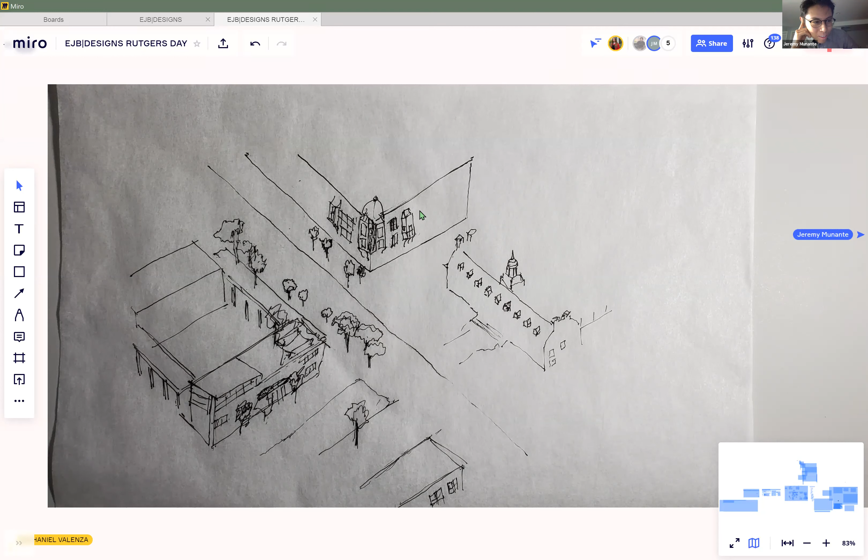Yeah, no, this is great. Thanks for walking us through your design process, and you explained it well. I think that happens to us designers where we bounce back and forth off our ideas because everything is interconnected and we have so many ideas at once. It's hard to stay on track with a speaking pattern to follow, but this is all great.

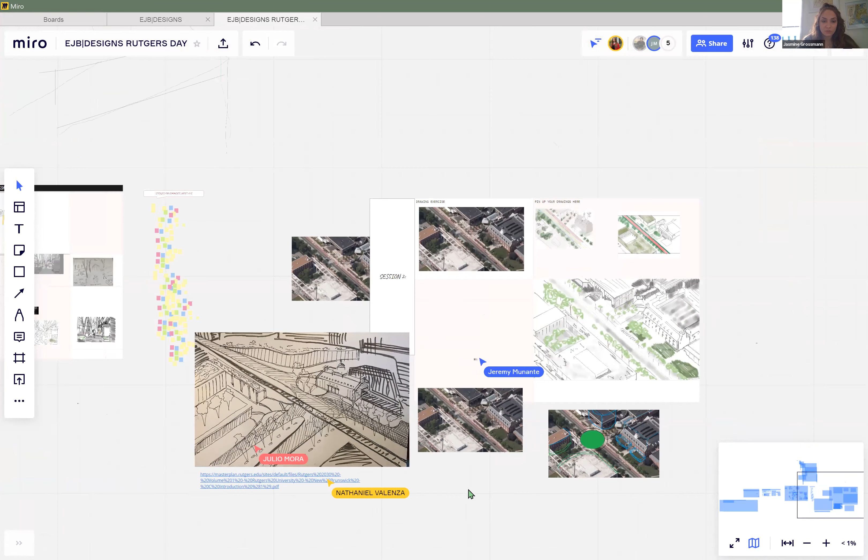I'd like to offer something here - you're all so good at this and know so much about the campus. It'd be nice if you had an online presentation for new students, especially students who haven't been on campus in a year and a half. When they come back, you could talk about your impressions of campus, and it'd be nice to have a design guide made by students.

That's pretty cool, that might have to be a studio. Doesn't have to be a studio, you could just put together your own website and put it on there. I think students would really enjoy that - I have so many in my classes, and you probably do too, who've never been on campus.

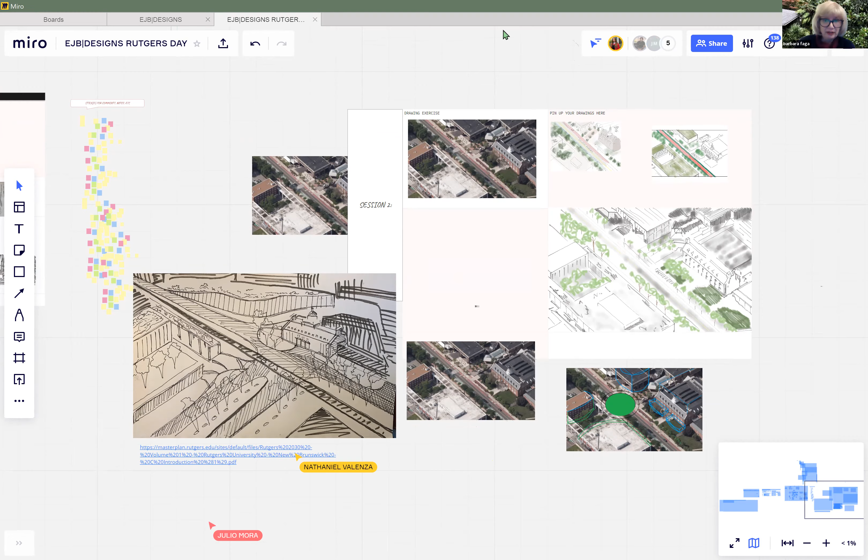Yeah, thank you, this has been great. I enjoyed it, I enjoyed seeing what you do and learning new software, this is all very interesting. Good luck, I'm glad everyone was able to join us.